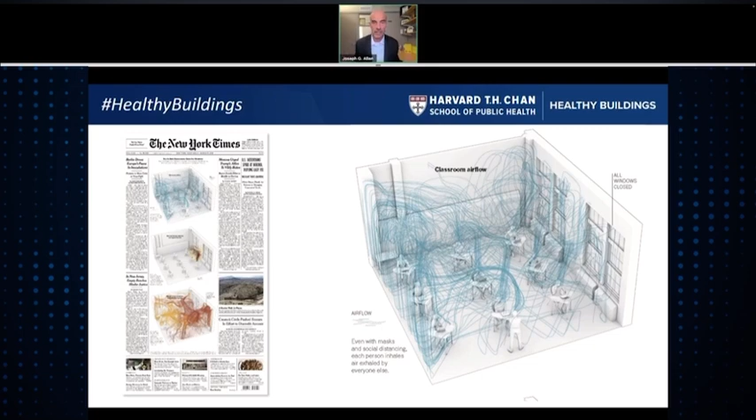And it turns out, depending on the ventilation or filtration of the room, it could be as much as 1, 2, 3% or more of the air you're breathing in every space you're in just came out of the lungs of other people in that room. So we call that the rebreathed fraction. So it makes sense. You want to try and minimize how much of that is occurring, especially if people are sick. We modeled this out to show what happens if someone's infected.

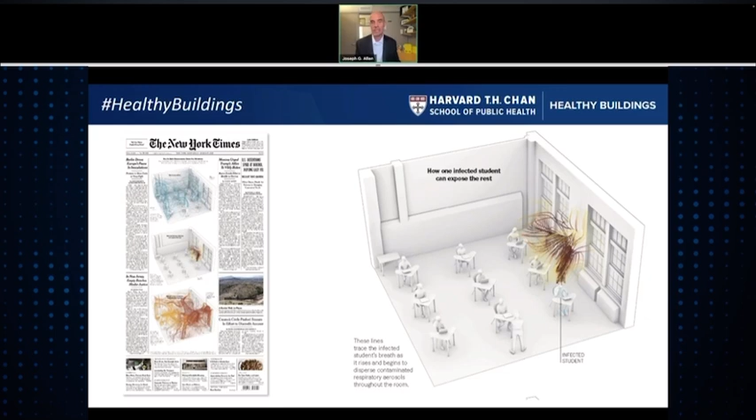In this case, we picked a student in the classroom emitting infectious respiratory aerosols, and very quickly you can see that the room fills up with infectious particles. You can see the overlay view over on the right here that the one person then fills up the room with high enough concentrations to infect many people. In fact, this is how we have super spreading events where one person may infect 70, 80, 90% of the people in the room. It's easy to see how that can happen when you visualize it.

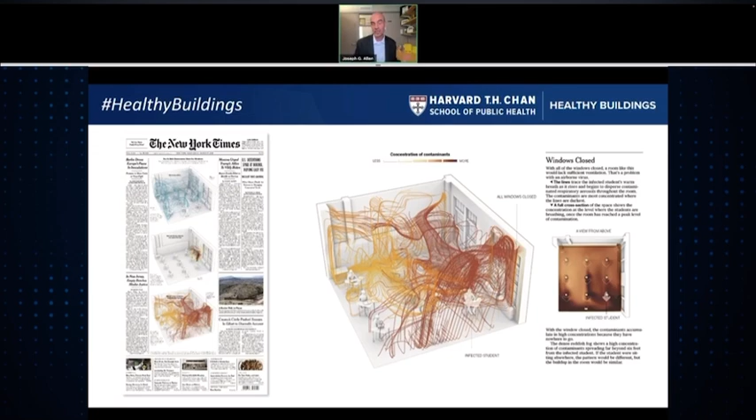Also important in the visualization is what happens when you take simple steps, like in this case, opening up a window. So the gradients change, the buildup of the smoke changes. You still have localized pockets, but already we see the reduced concentration. In this model, we then add a portable air cleaner with a HEPA filter in the back of the room, and the combination of ventilation and filtration dramatically reduces the concentrations in the room. Can transmission still happen? Yes, of course it can, but you're no longer creating the conditions for super spreading, where one person will infect people even at the far side of the room.

So we've learned our lesson, I think, from the pandemic. Before the pandemic, there was a lot of argument about how respiratory viruses were spread, SARS-CoV-2, but also influenza and RSV and others. But it's become quite clear that the dominant mode of transmission is airborne transmission, with nearly all transmission happening indoors. That's important because once we recognize that, we can determine what controls are necessary.

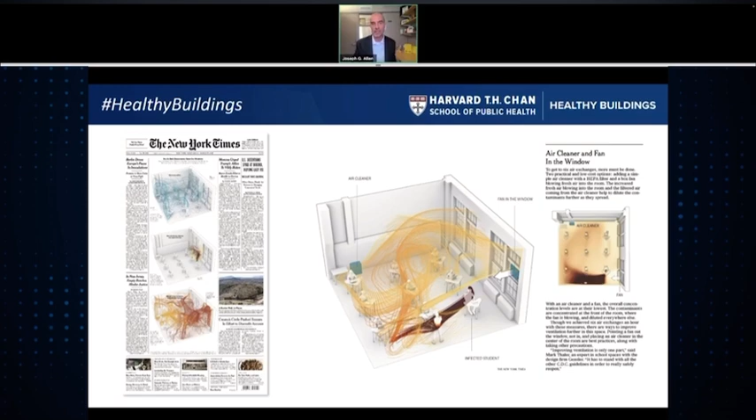The goal of good ventilation and filtration is not just to prevent or limit the spread of infectious diseases. There's also the many positive benefits around human health and flourishing and thriving. What's showing on the screen is a set of studies we did looking at adults and their cognitive function and indoor air quality. It's a set of studies we call the CogFx studies. This is the first one.

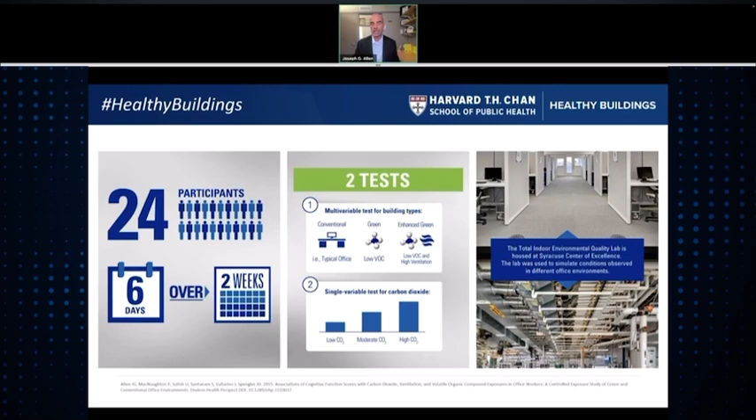Basically, we enrolled a set of participants to spend time working in this office environment, and we changed the air in subtle ways from the floor below without them knowing. And we tested their cognitive function at the end of the day. It's a double-blind test. And the results are really quite dramatic.

Controlling for other factors, we see that across 9 cognitive function domains, when we provide a better indoor environment, better ventilation, lower chemical load, we see people perform better on these tests of higher order cognitive function. How do they seek out and utilize information? How do they respond during a crisis? How do they orient themselves to different tasks? How focused can they be on the task at hand?

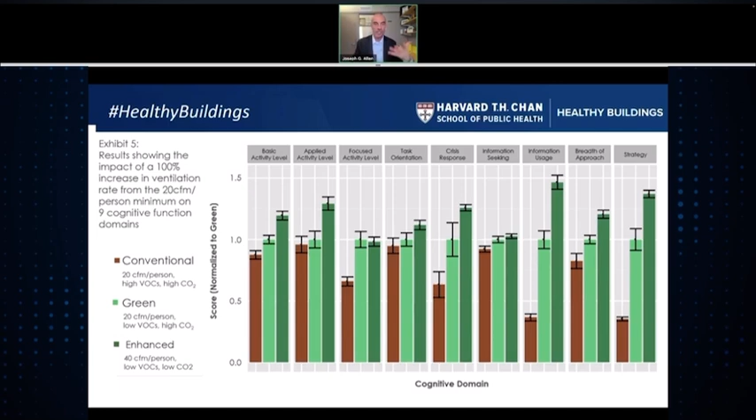So this is an interesting finding, but then the question is, does this hold outside of a laboratory? So 2 years ago or 3 years ago, we started a similar study. We actually looked to test people globally to see how indoor air quality impacted cognitive function. And sure enough, we see very similar results. And I've highlighted the blue box on the figure on the left.

This figure shows the relationship between carbon dioxide, or CO2, which is a useful proxy for ventilation and an indicator of occupancy as well. And on the vertical axis, or the y-axis, is the cognitive function test called the Stroop test. Something really quite interesting here is that we see a linear response, meaning even at low levels of CO2, we see a benefit of better ventilation in terms of cognitive function now out in the real world.

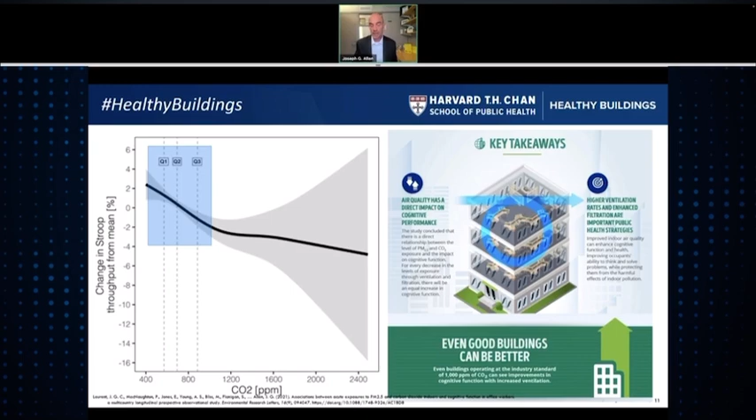A new study of ours in the CogFx series that just published maybe 2 weeks ago, we extended this to think about not just tests of cognitive function and addition, subtraction, but also the other half of the brain, the half of the brain that's focused on creativity. And sure enough, we find similar impacts. In these buildings with better ventilation, we see improved performance on tests of creativity, controlling for all of the factors.

That starts to paint a picture about how indoor air quality is influencing our ability of our brain to function on these tests of higher order cognitive function, addition, subtraction, and also our ability to perform creatively. So of course, what does this mean for schools? Well, of course, there's many adults working in schools, but also it's totally consistent with the full body of science on how good schools and indoor air quality influence student health, student thinking, and student performance.

For example, there are many studies now showing that kids in schools with better ventilation, better air quality perform better on test scores, math test scores, and reading test scores, and other tests of achievement. So we see this over and over in the literature. It's not surprising. We see similar results for adults and kids. In fact, we see it for kids of all ages, from the very youngest in schools all the way up to the very oldest in schools, and for adults as well.

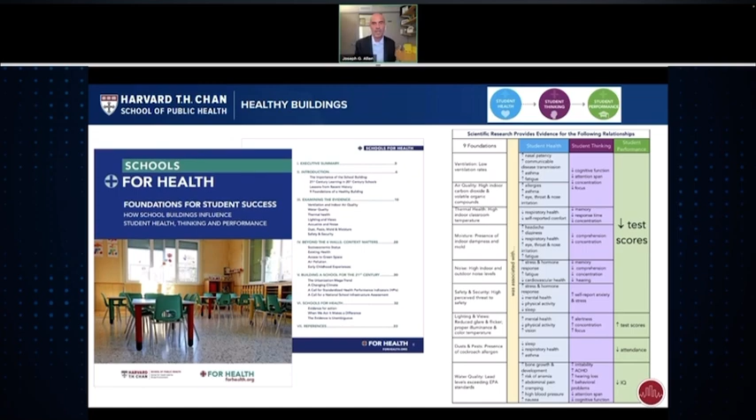So we know that ventilation and filtration, indoor air quality matter a lot to adult and kid health, thinking, and overall performance. So the key question then becomes, well, what are the standards that we're trying to achieve in terms of good ventilation and filtration? And this is an area that is starting to change and finally getting the attention it deserves. This is a piece I wrote in the American Journal of Public Health in August, looking at the history of ventilation, but as told through the lens of public health.

And the short story is this: over 150 years ago, Florence Nightingale told us that the only defense a true nurse either asks or needs is fresh air from an open window. Right about that time, there was a physician scientist named John Shaw Billings in 1893 who set the first health-based ventilation target of 30 CFM per person, 30 cubic feet per minute per person. In 1895, ASHVE, the precursor to ASHRAE, adopted this health-based target of 30 CFM per person. In 1925, 22 states in the US adopted this health-based ventilation target.

However, in the 1970s, ASHRAE developed the standard for acceptable indoor air quality, where they lowered the ventilation rate by half or more. We moved from a health-based ventilation target to a target that was set largely to mitigate and control odors from humans. So we went from a health-based standard to an odor control standard. The standard for acceptable indoor air quality is objectively not acceptable. It's not a health-based standard, but ultimately that's guided a lot of the decisions around ventilation in schools and offices and everywhere else we spend our time.

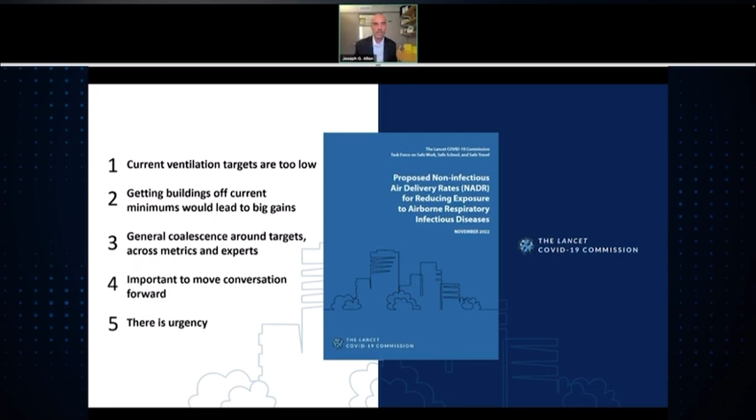There was general consensus around what those targets were, despite good scientific debate around which metric and what exact number. But there was urgency to move this conversation forward. We wrote a report proposing these higher ventilation rates to combat airborne respiratory infectious diseases. We used several different metrics. We provided the data in a good, better, or best format. And you'll see at least one familiar number here, that 30 CFM per person.

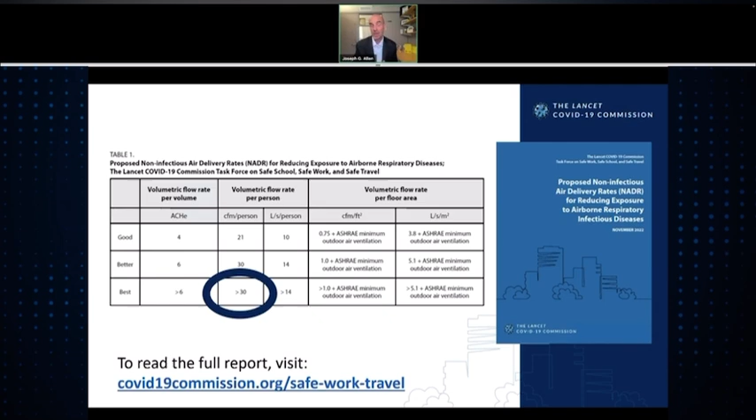We didn't invent this. This is over 100 years old. That was first set as a health-based target. All of the literature since then has supported this as a target. This number appears in my book, written before the pandemic, came out right during the pandemic, 30 CFM per person as a health-based ventilation target. This isn't a mystery. All the science points to this as a good target, certainly well above the floor of acceptable minimums.

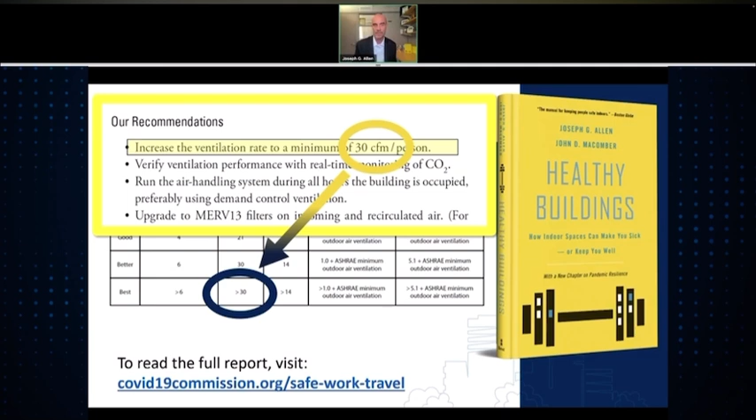We worked with the White House and had the first ever summit on indoor air quality, where we presented this work from the Lancet COVID-19 Commission. The White House used this to work with ASHRAE, who several weeks after that agreed to develop their first ever truly health-based ventilation standard. The White House also worked with CDC, and just a few months later, CDC adopted some of this work from the Lancet COVID-19 Commission and others, and they put out their first health-based ventilation target of 5 or more air changes per hour.

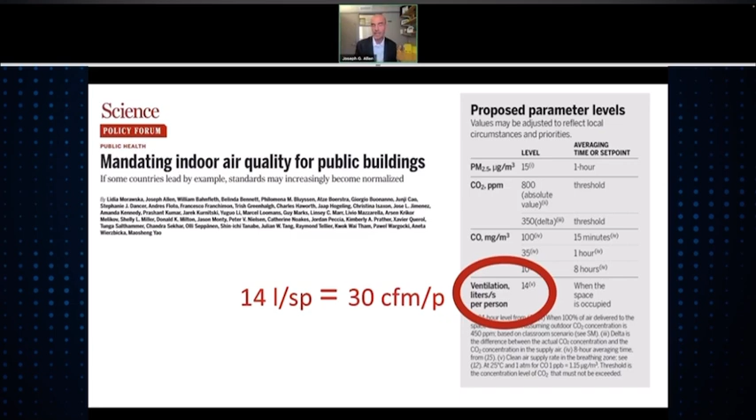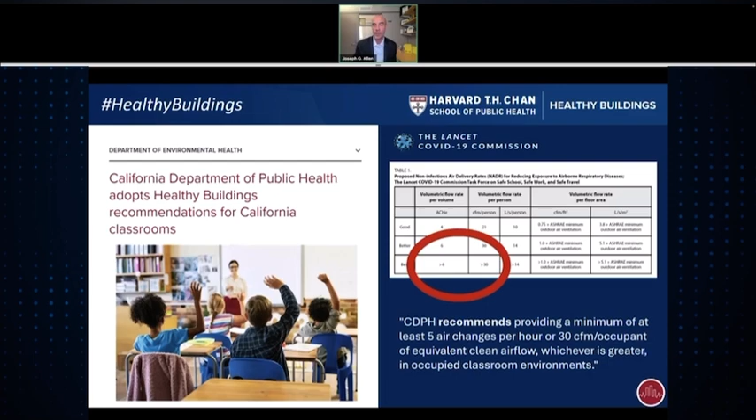So you can kind of see where we're going. We're actually returning to our roots from 100 years ago, getting back towards designing and operating our buildings for health. We had a really nice win just a couple months ago. The California Department of Public Health adopted the Healthy Building Recommendations for California schools. And you'll see here in the note, they followed and adopted what was also put forward by the Lancet COVID-19 Commission. California Department of Public Health recommends for schools a minimum of at least 5 air changes per hour or 30 CFM per occupant, whichever is greater.

Last thought, I'm going to pass it right back. This is a moment in time. Pandemics change societies in a million ways. One of the key lessons from the pandemic is we learned and got the message across that, one, indoor air quality matters for a lot of reasons: infectious disease, cognitive function, student performance, student well-being, and health. And two, we know that existing standards are simply too low. They're not evidence-based, they're not based on health, and they haven't been for a long time. It is time to recommit to ventilation, not as a technical standard for minimally acceptable conditions, but as a cornerstone of public health. Thank you.

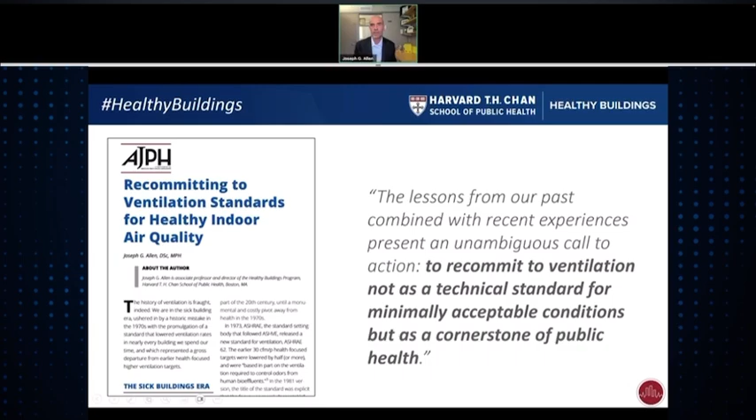Wow, thank you so much, Dr. Allen, for sharing the latest research on making the health case for indoor air quality management in schools, addressing adequate ventilation to manage airborne infection